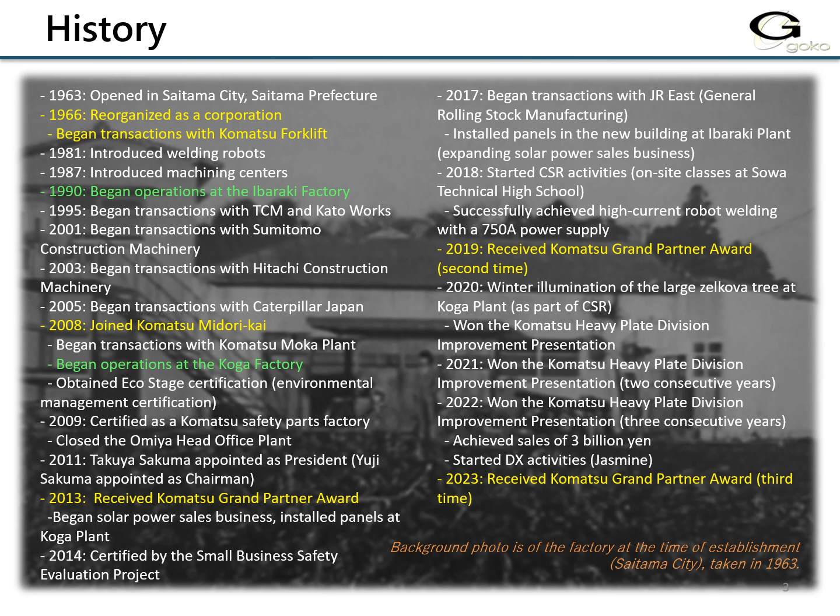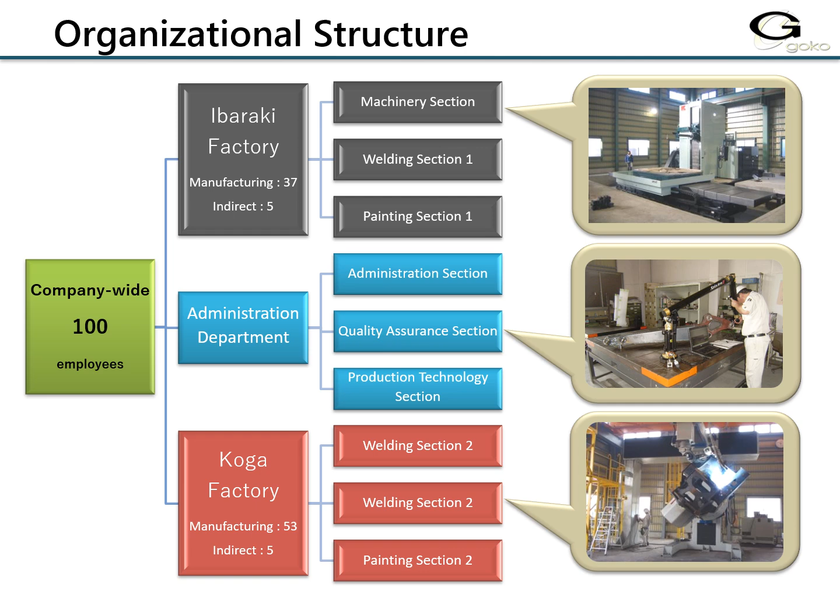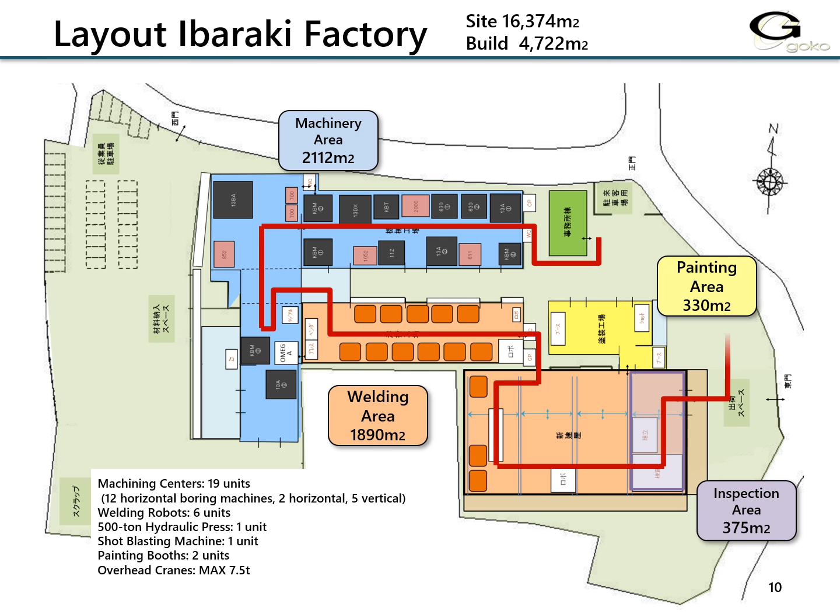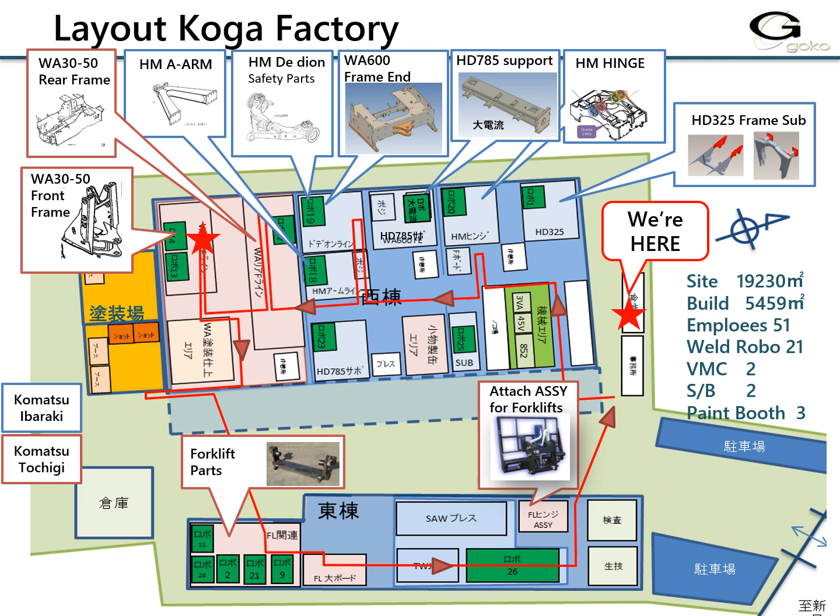Here is the layout of the Koga factory, which you will see later. Nearly all of the production is for mass-produced parts destined for Komatsu. We will provide further details during your visit to the Koga factory.

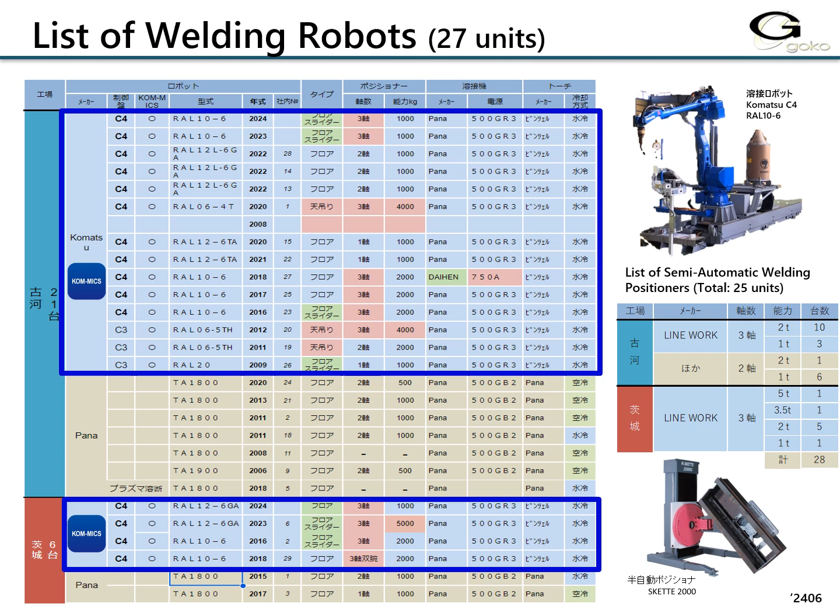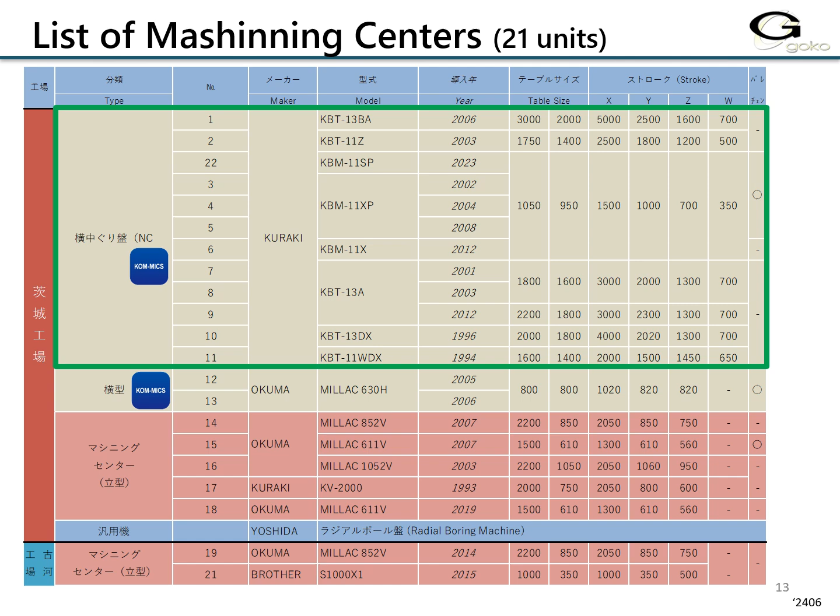As such, our equipment, including both welding robots and machining centers, has a high level of integration with KOM-MICS compared to other Midori-kai companies. In particular, we work very closely with the Production Development Center, quickly testing and sharing the results of the latest technologies. In recent years, we've seen significant advancements in inspection equipment, and we've introduced the latest systems wherever possible.

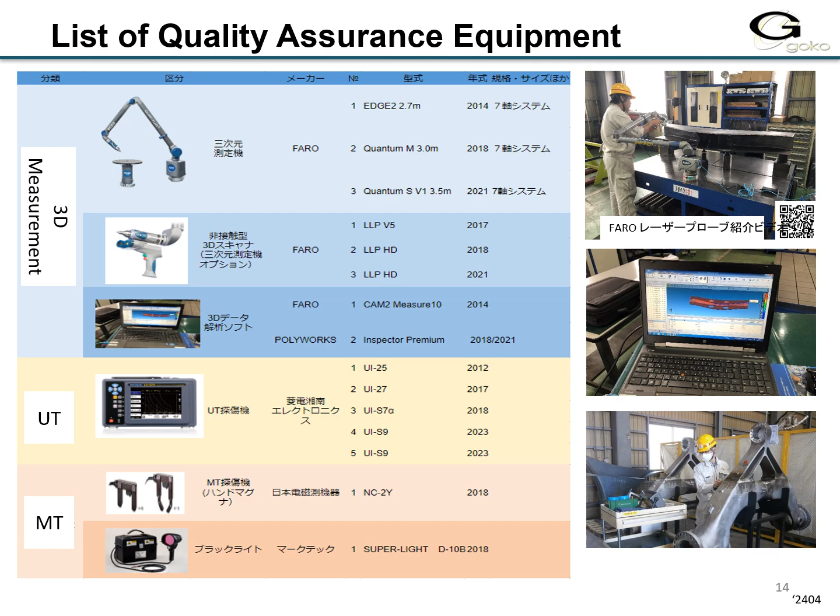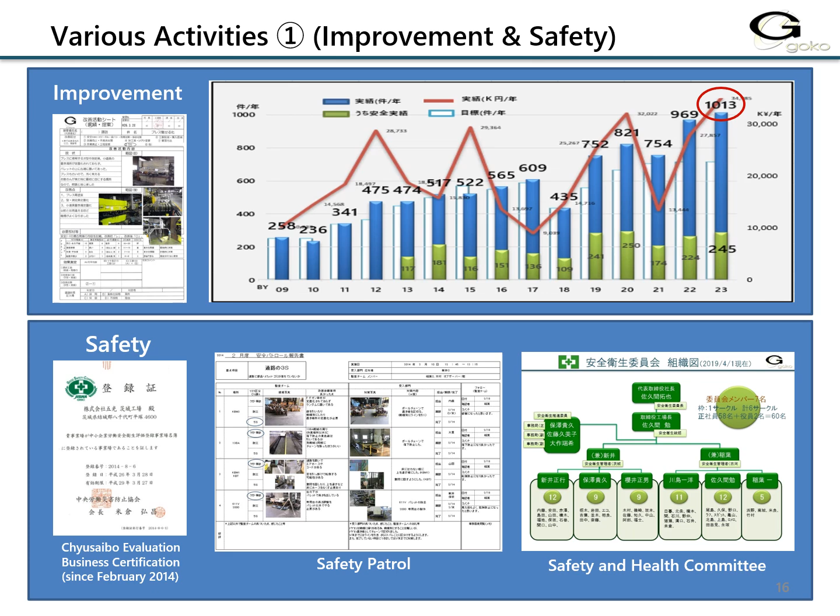We encourage improvement activities by employees, which are directly linked to salary evaluations. As a result, these voluntary activities have become well established, with over 1,000 improvement reports for the first time last year. One of the rules requires that 25% of the improvements must be related to safety, and the green bars in the chart above show those achievements. We also carry out safety activities under Komatsu's guidance.

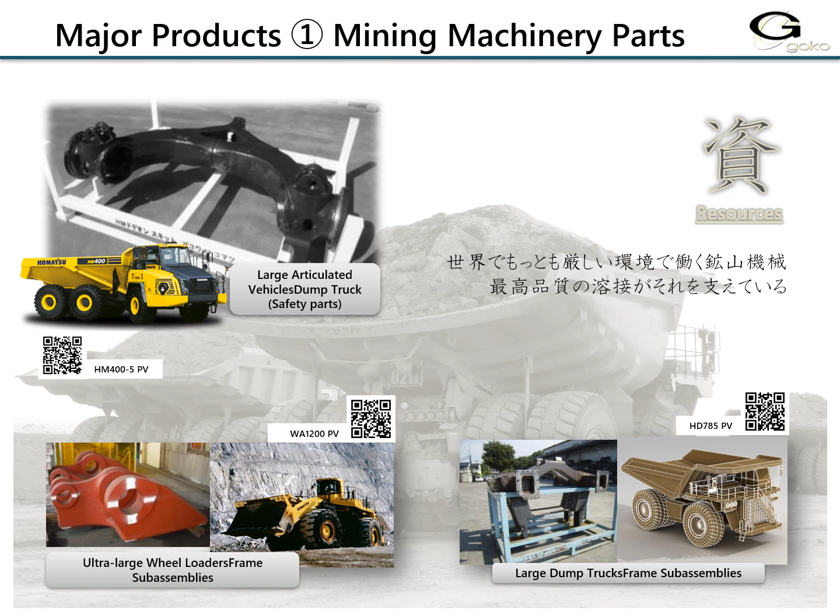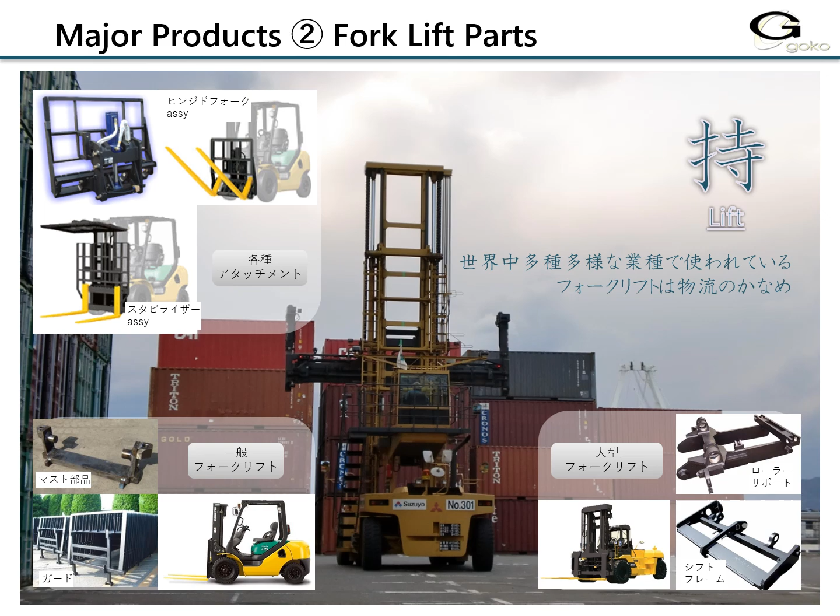From here, we will introduce our main products, starting with parts for large vehicles. Many of these parts require ultrasonic testing to ensure strength. These are forklift parts, which we've been involved with since the company's founding. Most of the parts are for attachments and working equipment rather than the vehicles themselves.

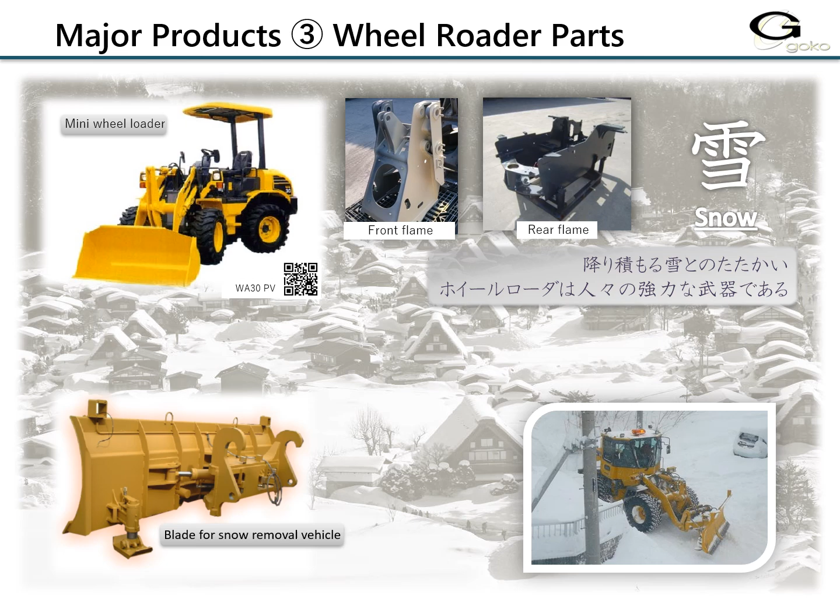These are wheel loader parts. The smaller models are almost entirely for the domestic market, with 60% related to snow removal work, so managing seasonal production factors is crucial.

Here are parts for customers other than Komatsu. These parts are for asphalt finishers used in road paving. It's a niche field, but in Japan, Sumitomo Construction Machinery holds a 75% market share. We supply all the replacement parts for the plate that functions like an iron.

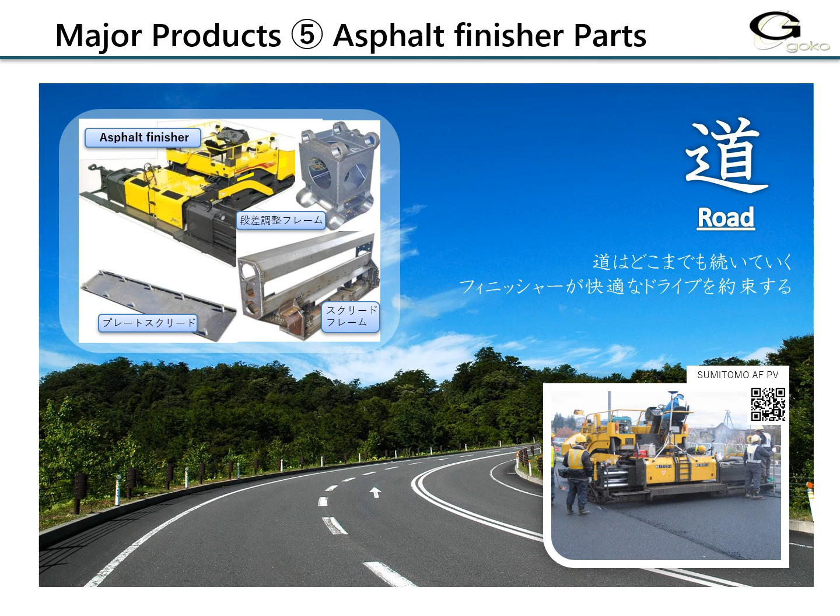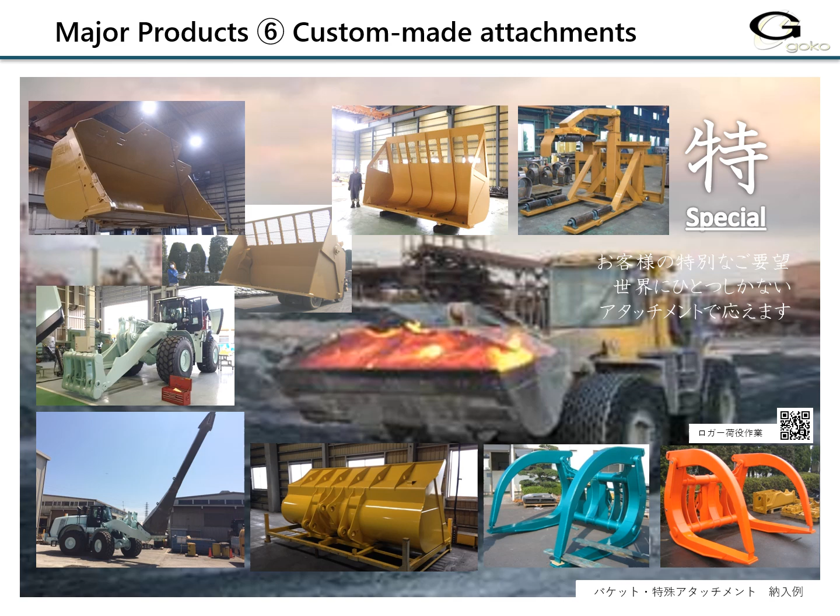These are custom-made attachments, mainly for large wheel loaders. Since these are one-off productions, they test our technical ability to manufacture without jigs.

In Japan, the declining birth rate and aging population are progressing rapidly, and securing young talent has become a common challenge for many companies. As one solution, we have partnered with local technical high schools to offer on-site welding classes. Through this initiative, we hope to inspire more young people to pursue careers in this industry. In fact, since we began this effort in 2018, the number of young workers has increased, and over the past 5 years, the average age of our workforce has dropped from 43 to 36, making a noticeable difference.

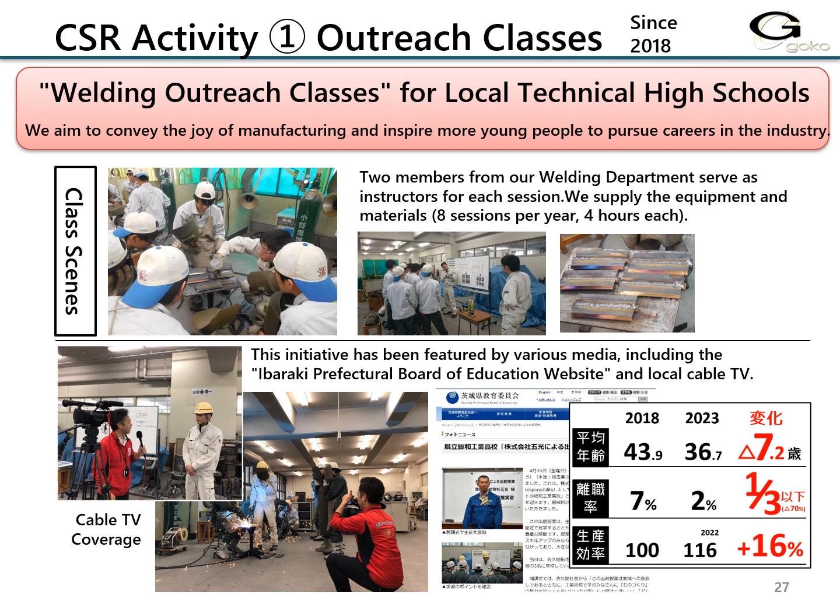As part of our commitment to the SDGs, solar panels have been installed on the roofs of our factories. With a capacity of 440 kilowatts, the reduction in CO2 emissions is equivalent to 100,000 liters of oil per year, or about 500 drums.

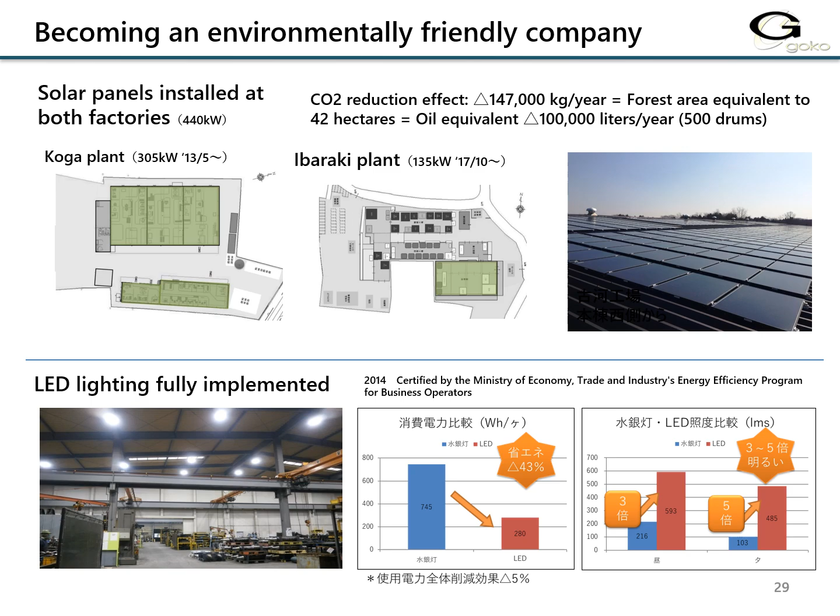This concludes the company introduction.